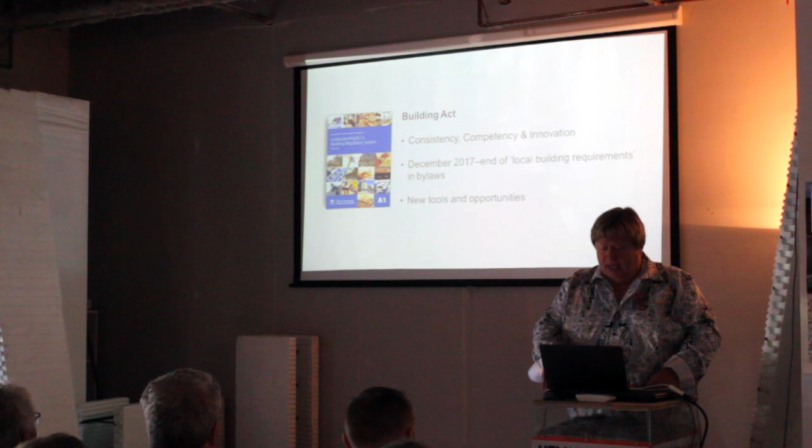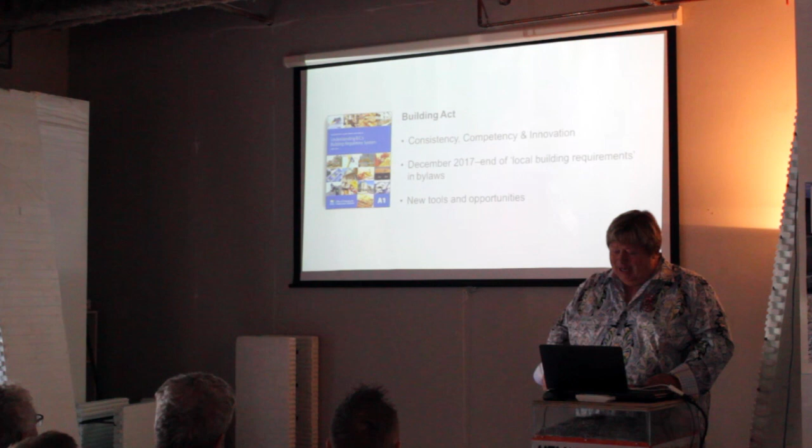A lot of political stuff here. The Building Act in British Columbia makes the building code actually law. They've declared that it's going to be consistent, with renewed competency and innovation embraced in the BC Building Code. In December 2017 was the end of local building requirements in bylaws, so nobody's had any trouble with the building official giving you weird interpretations since last year, has it?

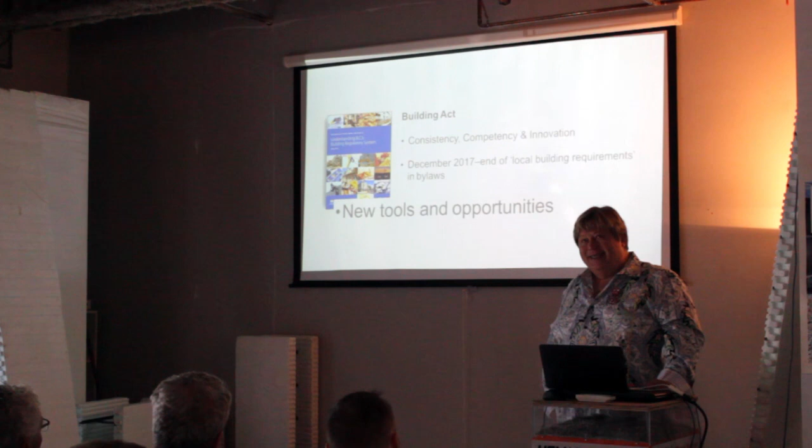The intent of regulatory reform, the intent of all these programs, is to see a general migration towards a smoother, easier, more consolidated approach to administering building codes and designing under building codes. But everything takes time. This is the chirp chirp from Victoria, and I do want to put it out there because when they say things, they're accountable to those things, and that allows us to hold their feet to the fire.

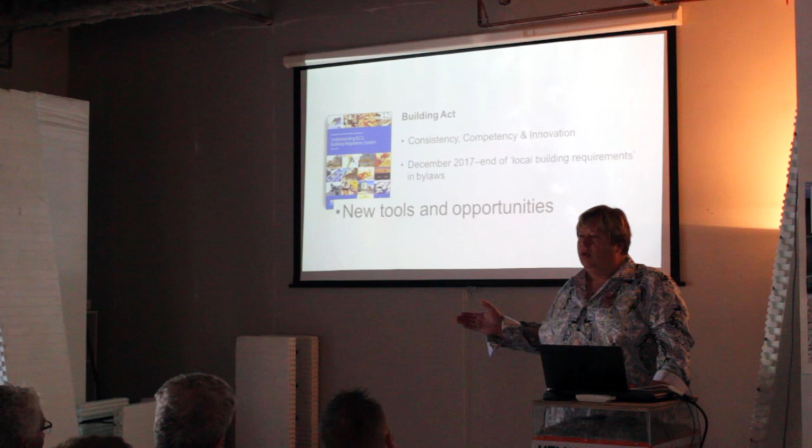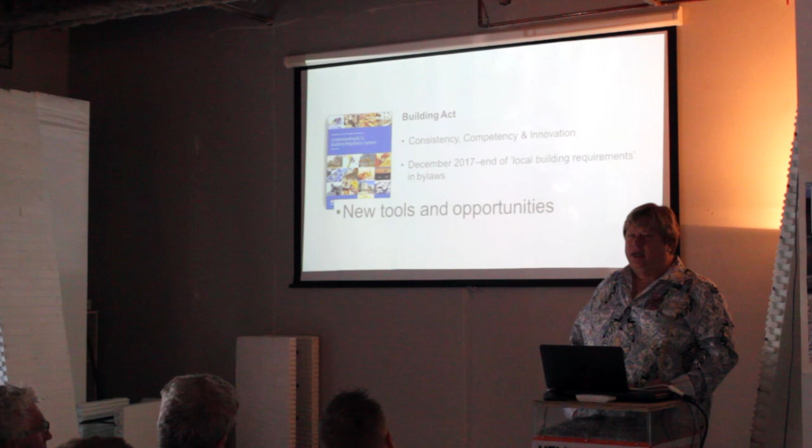It's also embracing new tools and opportunities, and we see that. Our new building code now has a prescriptive allowable section for exterior insulation and finish systems, EIFS. Anybody here know what EIFS is? Well, it's back, and it's allowed in Part 9 with channels as long as they're not less than 13% open and 9.5 millimeters deep. Is it good? I don't know. We're building a bunch and testing them because I don't think it's a trade-off for rain screen, but the code allows for it. So they are definitely looking at new tools, new opportunities, and embracing a greater cross-section of solutions.

But in my opinion, mixed into our building code now are specific allowable approaches to some stuff that's a little bit scary hygrothermally, especially in a marine environment. It's mild, warm, and it rains a lot, and it doesn't dry out very long in between those events. That combination makes us hypersensitive, so I think we want to pay attention to that moving forward.

Download it, read it. We have a climate leadership plan. In here is where they declare that we're going to be net zero ready for all new construction by 2032 in British Columbia. With the country now declaring that they're going to be there by 2030, I'd be interested to see if the BC government refines their approach to net zero ready or pulls those dates forward. And the reason I ask is because BC has been first and foremost since at least 2 codes ago.

And they kind of covet that position, and then suddenly this puts them in second place behind the country. We may see even a shortening of that requirement to step 5. So net zero by 2032, an energy step code for local governments to implement. There's the control that we talked about, and they've refreshed the Climate Action Charter, which I've come to understand is saying, well, the old Climate Action Charter wasn't something that we did very good under, so we're going to change it so that we got a chance of maybe achieving it this time.

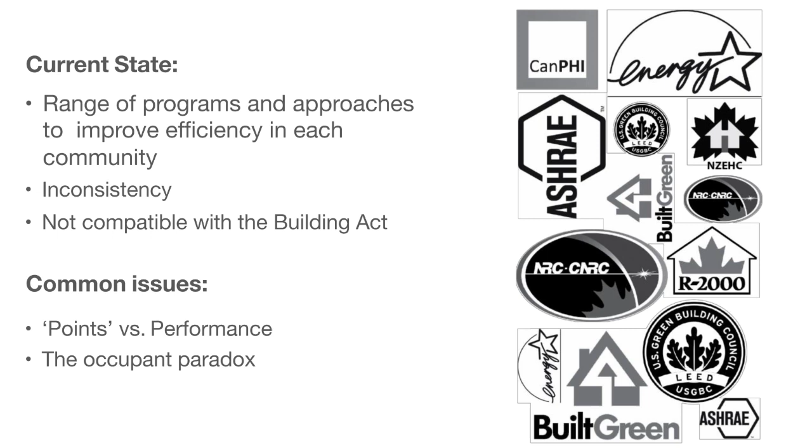So a lot of interesting things going on in the current state. We've got a lot of programs for energy out there—Energy Star, the Passive House Institute has a Canadian standard for passive house. That is like net zero times crazy—super, super high energy efficiency. That's where when it gets cold in the house, you clap your hands together and rub them, and that warms it up. We're hearing rumors that the Canadian and British Columbia political processes are looking at targets in that range for another 10 years down the road beyond 30. I'll tell you right now, that's a lofty goal.

ASHRAE is a tool that we can use as design professionals, engineers, architects, and specialists who deal predominantly with mid and high-rise big boy buildings under Part 3. That's their tool, very comparable to our 9.36. When you compare them, they look very similar in how they're used and what they're concerned with, but the ASHRAE standards and the National Energy Code for Canada are really targeting larger structures. Part 3, 9.36 is intended to be our goal, or rule book, for Part 9—so under 4 stories and less than 6,000-ish square feet in footprint over the lot. A lot of things you find in these different programs, the old R2000, and some of the new ones, is they muddy the waters between energy efficiency and environmental sensitivity.

I've done a lot of lecturing, I see a lot of familiar faces in here. I don't want to go too far into proving this out, but you can make some tremendously smart energy efficiency decisions that are horrible for the environment. Case in point, British Columbia: changing over from an old tungsten filament conventional light bulb into compact fluorescent. When you put electricity into an old light bulb, you get two things out of it—light, which uses almost none of the electricity, and heat. But what's interesting is, because it's fueled by electricity, at what efficiency does it produce heat? 100% efficiency. That's the beauty of electric-driven heat. If it's producing heat, it's doing so by definition at 100% efficiency—otherwise it's just not using energy, or it's using energy for something else, like light or kinetic motion. But if it's heat coming out of it, it does so at 100% efficiency. Now, when you take all those 100% efficient electric heaters out of a house, consider for a moment what's the green carbon footprint of electricity in British Columbia?

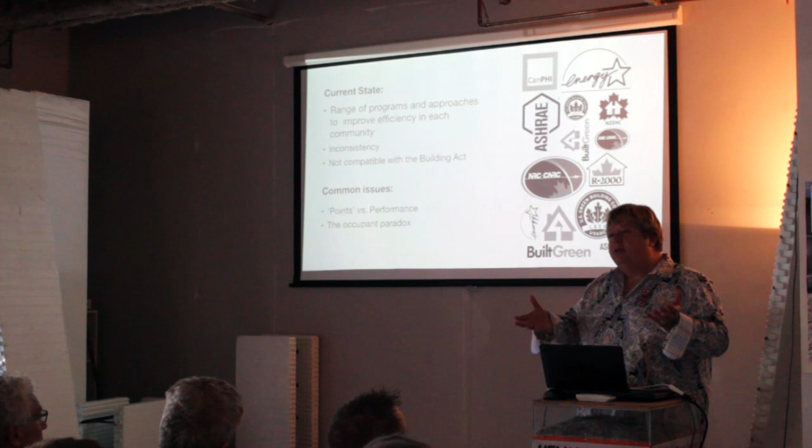And I'm really compelled to not make green choices here in British Columbia because I'm chasing the cheaper fuel, even with carbon taxes and everything else. There's a lot of interesting stuff that goes on, and I haven't even touched on some of the other challenges. If you look at LEED and Built Green programs, they balance energy efficiency with doing things that are good for Mother Nature as well, and you get points for this, and the combination gives you your labeling.

It's important to understand that 9.36 and the STEP code, and the legal jurisdiction of the federal and provincial code, only relate to energy, not the environment. So when we talk about energy efficiency and chasing 9.36 and a STEP code and all of these things in our building codes provincially and nationally, we are not driven by an underlying conscience for the environment. We are being driven specifically to reduce the consumption of energy, and there's nothing suggesting we're driving that consumption to a greener energy source.

There's a lot of pressure for us to burn more natural gas. So I commend that we have programs like Built Green for Houses under CHBA. These are important, but they aren't all energy programs. They will have a role moving forward, but their role will be that at the baseline they meet a certain energy performance criteria that matches to a STEP code, and beyond that you're doing something good for Mother Nature.

And that'll be for those few but very real consumers out there who have the money and are quite green-vested — they're willing to pay extra money to do the right thing by Mother Nature. And there are builders who concentrate their practice on that.

When you look at the green footprints of these products, and compare foam plastics in an expanded format versus extruded or foamed in place or polyisocyanurates, this stuff greens pretty nicely. It does come from an oil derrick, but then it's steamed into a sort of a big Rice Krispie treat, pressed into its compressed formats, and then put into these wonderful shapes that we can use as leave-behind forms, which dual purpose and bring efficiency and fantastic building science to construction.

So there's a lot of things for us to think about. At the end of the day, remember, this whole conversation for the STEP code is all driven towards energy efficiency. Everybody wanted to get their name in here, apparently all of these groups were spoken to.

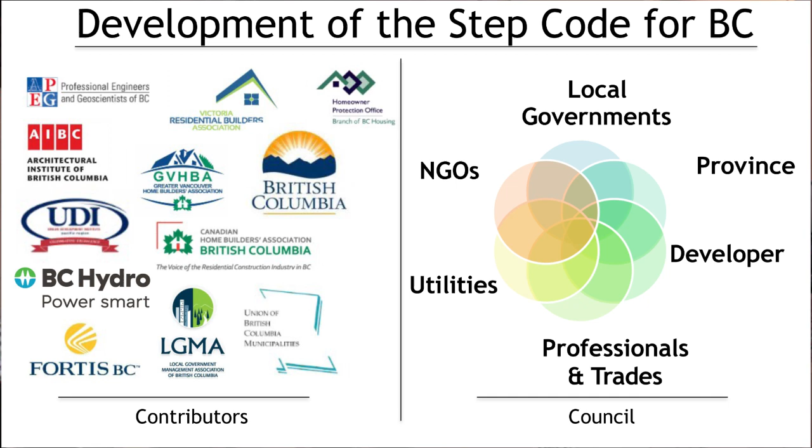I'm a member of Canadian Home Builders and GVHBA. I do personal or professional consulting for the province in the Homeowner Protection Office. I sit on the national task groups for many of the Part 9 code elements that we deal with here. I consult into Hydro and I consult into Fortis, but nobody even picked up the phone and called me about the STEP code when it was being developed.

There's a lot of people that want to talk about how the government is inclusive and they're putting everybody in here - look at the bottom, professionals and trades. How many people in here got a phone call, letter, or anything on the development of the STEP code when it was being proposed? How many people heard about it first when it became a requirement last year in '17, or are just becoming aware now? I don't want to pick too much on the government here, but their outreach is pretty shitty.

Energy STEP code - here's what you do right now. Step 0, if you want to call it that: if your community hasn't adopted yet, and many of them are in this position, then you're just bound by 9.36, and you can do prescriptive trade-offs or an energy model with an energy advisor. Obviously it's going to hit the level on average across all the climate zones we're averaging right now, so there's no net improvement to doing what we're already doing and continuing to do it.

When you go to Step 1, a lot of people have asked, well, what does this mean? What are we going to be delivering at the end of the day? Well, what you are going to be doing is abandoning prescription and trade-off. You're going to be working with an energy advisor, and in the politically softened language, they say the energy expectation there is improved. I don't know, because it doesn't improve it in any metric that we measured. It just firmly establishes that we're working with energy advisors and achieving the minimum requirements expected under 9.36.

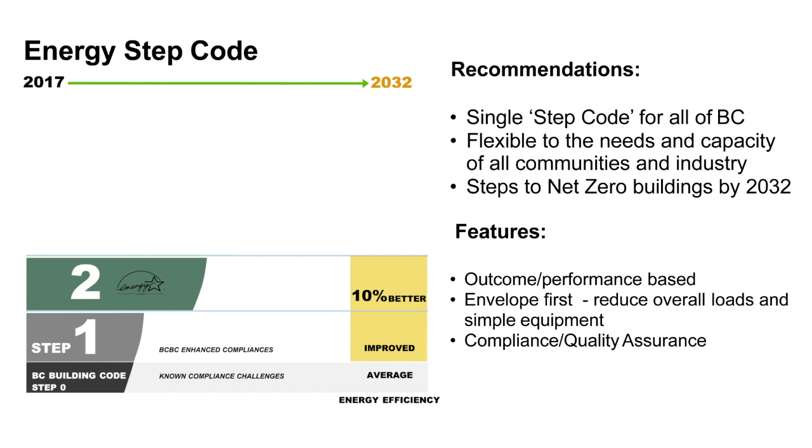Where we start to begin to see change is when they adopt into Step 2. And I'm not belittling Step 1 - if you're a community and you want to jump in and you're scared about changing the nature of construction, going to Step 1 just gets everybody used to working with an energy advisor, creating those habits in design and construction. That's actually going to be half of the challenge for most of us through this whole STEP code: learning to trust and engage quality energy advisors who know what they're doing and know what options are available out there, and can help you research and develop the choices you're going to make.

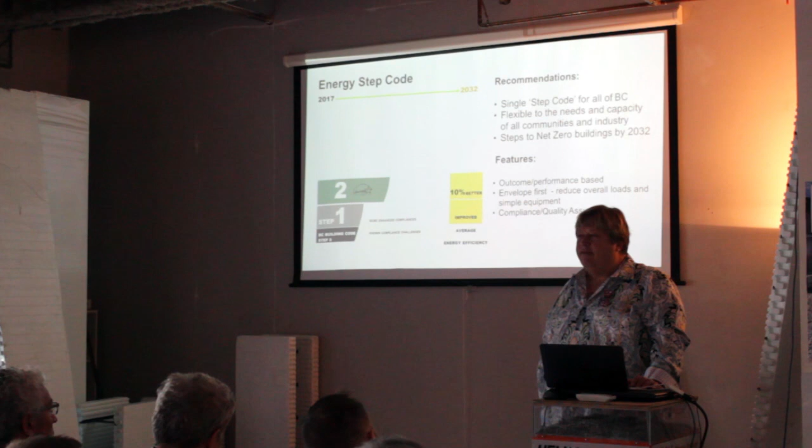Here's a caution I put out to you. We just took - and this is not a dig - our warehouse girl who worked at Safeway, and we jammed her into the Energuide Advisor program in May, and she's now an Energy Guide qualified, nationally certified energy professional. We've piled her up with the door fans and everything else, and oh my God, she's been crash-coursing in building science and everything else, but in her own words, 'I'm not doing this without you overlooking all the files.' We offer a very comprehensive service beyond energy.

We'll give you the energy advisor, but we'll help you figure out what you want to build, how you're going to build it, what the hydrothermal risks are about that, where the cost advantages are, tricks, trades, all that kind of stuff. But working with an energy advisor, jumping in at Step 1, as soon as everybody's in this situation, how easy is it going to be to find an energy advisor 2 and 3 years from now? So if you're not working with one right now, strong suggestion: lock it up. Get somebody who you can work with, who you trust, who's reliable, who's professional, who has experience that satisfies your needs, and pay them what they're asking, and let's get used to it.

How easy is it right now to find somebody to put siding on a house?

Imagine what it's going to be like when everybody's jumped onto the step code. What happens when the provincial government—because right now they're encouraging municipalities to jump in—what's the history of government? They give you incentives and encouragement to do something, and then a year later, what usually happens? They make it law, and all the money goes away, and all the freedom goes away, and you just have to do it. So reading between the lines, all your communities in BC, I think you can reliably expect are going to be somewhere in the step code in the next 18 months, maybe less.

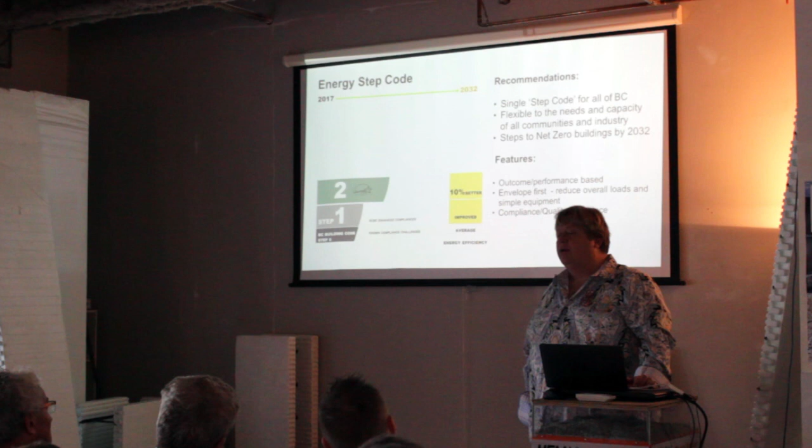At step 2, which is consistent with sort of Energy Star as a program, what you would gain if you subscribe to an Energy Star project is about 10% better energy performance than what you have right now. Moving through to step 3, you're starting to align yourself with the highest level of Built Green program, the CHBA program for energy and sustainability. You can see that's actually a marked improvement, 20% energy performance improvement. That's real, that's measurable. If you're just doing it in money, the money you're spending on energy you would expect will go down by 20% if everything else kept level.

I will also suggest, if we were only going to step 3 and building to that level, you could do what you do today and you'd probably be okay. You just need more insulation in the wall—so you go from R20 to R22 to R24. You'd push your R values in your attics up, and you'd push your R value below grade up substantively over where we were in the past. By doing that, getting air tightness under wraps, you could continue to build the way you are right now. And hydrothermally, the risks are probably not that much greater.

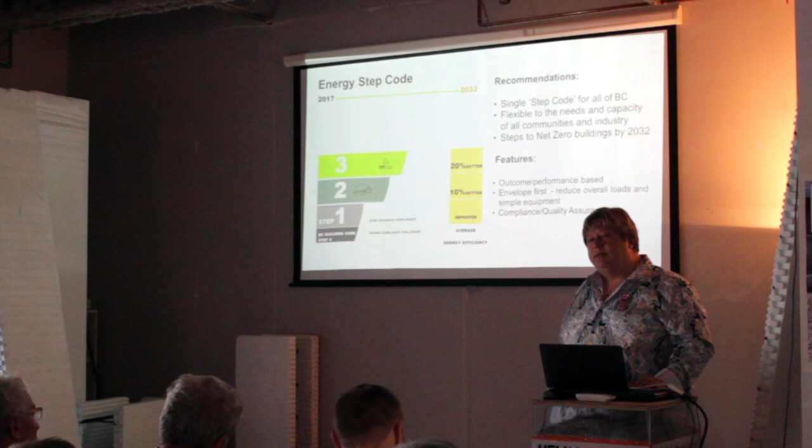But beginning at step 4 and 5 and beyond, something weird starts happening. If you continue to build basements the way we do conventionally, with studs and pink insulation and poly on the inside, they will just fail. If you continue to build walls out of 2x6 and try and stuff more R value into that cavity, you'll reach a limit far short of step 4 or 5 or beyond. And if you continue to vent conventional attic spaces, they're all going to go moldy on you. It's just night sky cooling—lots of studies on it. We know this. We have houses right now that work by accident because of that energy flow. And when we take it away, these are the symptoms: basements and walls and attics, the way we currently build, stop working.

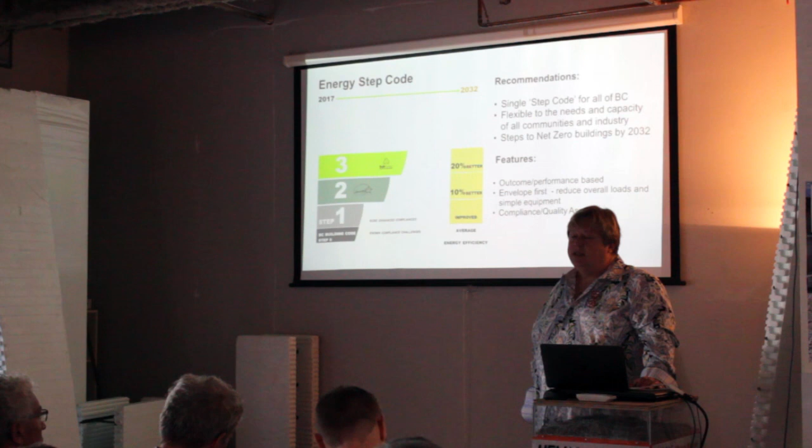So as we move towards step 4, and certainly when we make the quantum leap into step 5, you will be building different houses. My message—if nothing else leaves here with you—is that you have a choice in this industry as a professional, as a builder, as a supplier, as a manufacturer, as anything. The most efficient thing you can do right now is find an energy advisor group you can rely on to grow with, and make a very significant effort right now to figure out what changes you're going to make to your methods in construction for basements, walls, and attics.

So what I'm saying here is, I could sneak out with a 2x6 wall for you up to about this level. Once you go beyond this level, the old R2000 level, I can't do it for you with a 2x6 wall and a conventional vented attic. They just don't work anymore—too little energy flow through the envelope to reliably get reasonable performance. And that's exaggerated in the marine environment, so you're soaking in one of the toughest environments to build high energy efficiency. The irony is, the reward for high energy efficiency in our environment is the least of Canada, because our heating degree days are sub 3,000. The rest of Canada is way north of 3,000 heating degree days.

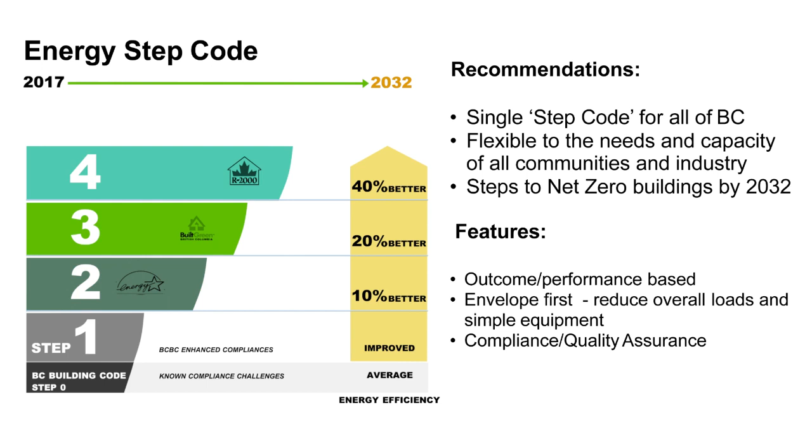So we get the least advantage for energy efficiency, and we incur the greatest risk. If you're working in 5 communities right now, say City of Vancouver, Surrey, Tri-Cities, Burnaby, and Aldergrove, or even just 2 of those, what are you going to do if one's at step 0, one's at step 1, one's at step 2, one's at step 3, one's at step 4, one's at step 5?

That's my question. Is it mandatory to take step 1, everybody? Are we back to municipalities where I gotta go, Burnaby, oh you're at 2, you guys are at 3, 1? Is there a minimum, first of all? No, the minimum is if they don't adopt anything, it's 0, it's status quo under 9.36.

So what I'm suggesting is you could research a way to alter how you build roofs, walls and basements now, and keep the energy intensity low by using minimal blocks, minimal insulation, achieving air tightness through greater detailing, and getting rid of vented attics, moving toward a system where you don't have to get fatter and fatter with that wall, because the penalties there are huge. It eats up FSR, and it's very inefficient to use fluffy insulation when the wall gets fatter and colder on the outside, so it risks more and more failure.

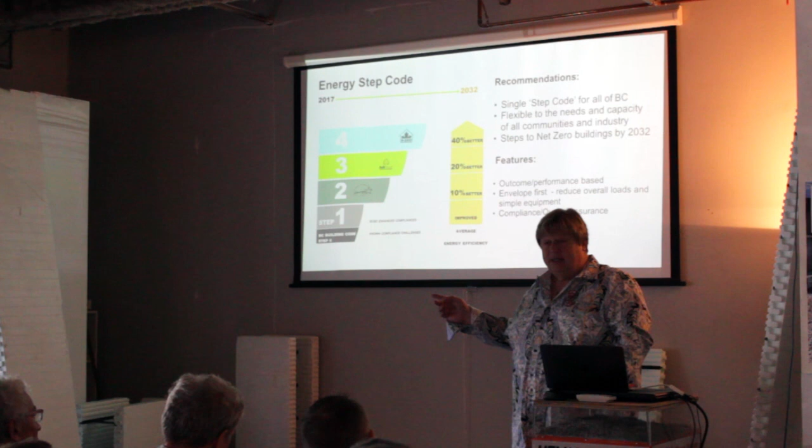What you want to do is take a look at all your different options. What about ICF all the way up to the rafter? It's crazy good for the basement, but also crazy good hygrothermal performance above, and at R24 effective you're already past City of Vancouver requirements. By building into this minimally, yes, you're overshooting steps 2 and 3, but you're learning how to work with these products.

So if we go to that code right now, we're doing our own codes. When I go to Langley, they say, hey, nice job. Then Burnaby says, hey, you guys really have to do this. And Langley says, hey, wow, you guys are doing a great job, we're only at step 1, you're at step 3, and you're achieving step 3.

You could keep your attic insulation lighter in value and switch over to a conditioned attic instead of unconditioned, and move all your mechanical equipment, if you've got a full basement, up into that attic, so you don't have to insulate all the ducting when you push it up. These changes in construction type allow other freedoms in design, which actually make construction, even though you're overshooting step 0 or 1, still competitive.

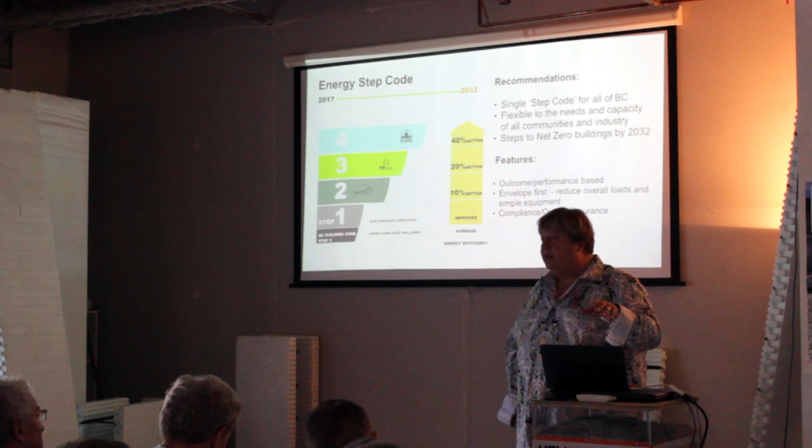And in fact, I can show you it for sure keeps you competitive, even against other people doing a 2x6 with a vented attic and a garbage basement. It's going to come up to the builder then who wants to do that and get ahead of these guys. I'm going to determine it, not Langley or Burnaby.

You're taking control. Now, let me add one more thing. If you get good at that, what's the only thing that changes marginally from jurisdiction to jurisdiction? The block or the exterior width on the outer wythe, or adding more insulation to the outer wythe. With your attic, it's just more insulation in that conditioned format. For air tightness, it's just greater attention to detail at your detail transitions so you can gain that air tightness. But the skill sets for you, your subtrades, your supply chain, everything remain unimpacted as you progress through here.

If you don't, and you try to sneak this out, you may have to relearn how to build twice, at least, through the step code. Who wants to go through that? It's crazy.

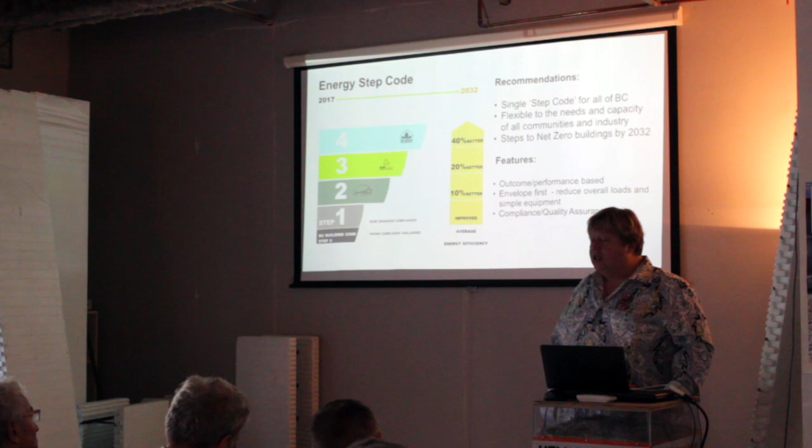So Mark, if you go to a conditioned attic, what material would you use for insulation that doesn't require... it's got to be airtight. That's the condition by which you have to achieve it.

SIPs or something like that? SIPs will work. SIPs works better with a vapor open peel and stick. When we go up north, that's where the failure is in SIPs, at the joints. So we foam the joints, but we cover everything with a vapor permeable peel and stick as a second plane of protection. It's awesome, 2-pound foam, amazing.

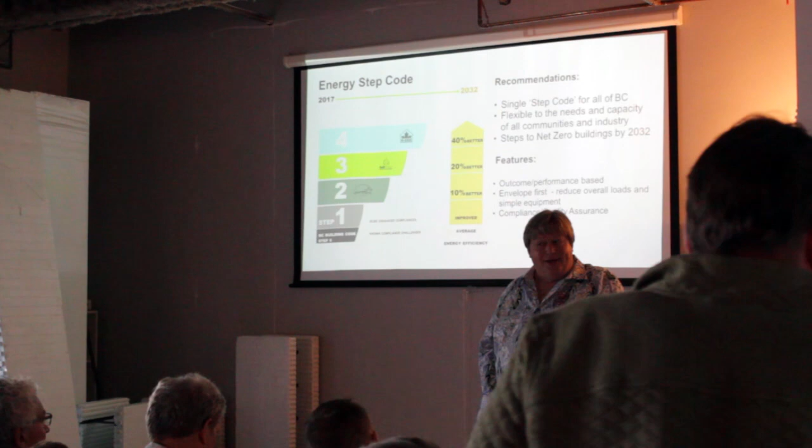What's ironic is they had a beautiful way of accepting foam just before Tim Rice and Dave Ramsley left. I don't want to talk about the City of Vancouver too much, but when they say no, they say no. Next week we've got Chris and all the people coming over from the City of Vancouver. We're showing them conditioned attic approaches and why they work. I think it's an idea whose time has come.

It absolutely is, let me reinforce that concept. 20 or 30 years ago, how did you build a crawl space? You put the insulation and air tightness up on the floor and vented the crawl space. How do you build crawl spaces now? Anybody building that way? You insulate the walls, you create air tightness, and your envelope now becomes the slab, the walls, and the continuation of your envelope. When did the code change that took us from vented crawl spaces to conditioned crawl spaces?

2006? No, early? No, it didn't change. You're still allowed to do both, I don't see it the other way now. It was the builders that took us there.

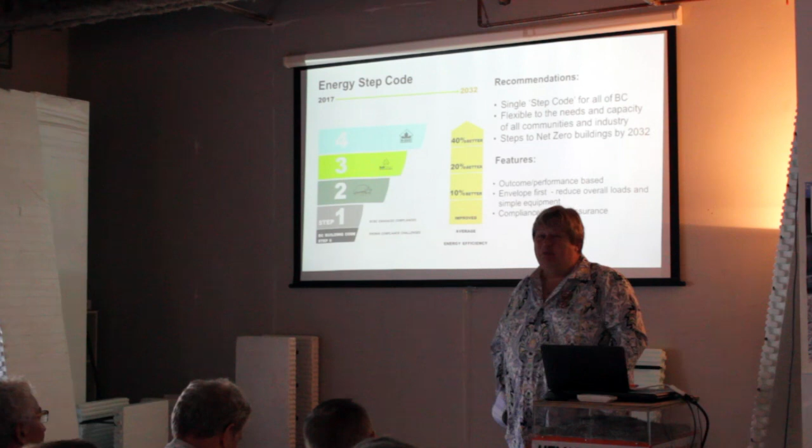The builders took us there because when they were putting in a crawl space home, they were forced to use square footage on the main for a mechanical room. Then some builder looked and said: if I condition that crawl space, and talk to the mechanical community so they build me equipment that works in a 4-foot clearance, I can stick it all under the stairs and in the crawl space, and now I can sell square footage that was a mechanical room on my main. When they ran the numbers on that, it paid for the whole transition.

That's everywhere up country, right? Now we're faced with the reality that a lot of people are completing basements or leaving unfinished basements. When you get up north to build a crawl space, you actually have to dig a basement and then backfill it, so they just leave unfinished basements in there. But if you do that, then where do you put the mechanical?

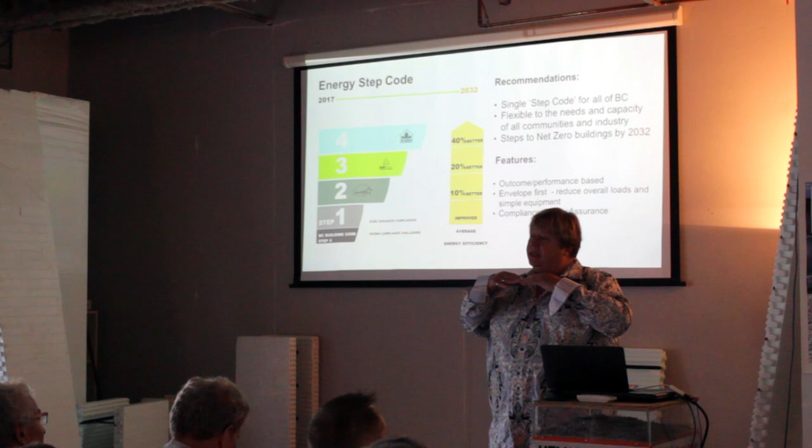But if you condition the attic by taking the insulation and air tightness off the ceiling and pushing it up, what can you stick in your attic now? Everything. You run ducting through there so you can run all your service and air conditioning, dropping heavy air down so you don't have to overstress your AC or heat pumps. You can put high side returns in there for great circulation. It's just cheaper, faster, better, and it's all stuffed up in that conditioned attic. You save a lot of money.

And think about your ceiling now - what kind of pot lights and everything are you putting through the ceiling? Regular ones, because your envelope's up. The key is it's got to be airtight, and that's why foam plastics, spray-in-place foam, or SIPs are really good choices. You're free to play with ICF too - I don't know if you're allowed to span it on a sloped roof, but that'd be kind of cool.

And then when we get to step 5, basically they're saying net zero ready. Some people are throwing numbers around of 80% better, but we've run some numbers on step 5, and there's every likelihood it could be 100% or better energy performance than what we're dealing with right now.

How's our time doing here, Joe? Okay, what time's lunch coming? You got 40 minutes? Perfect, exactly what we need.

So what we need to do is look at the step code - for step 1, 2, and 3, you're going to be working with certified energy advisors. I think they have a different name for them now at NRCan. Everybody needs new business cards in government every 2 months with new names. But what an energy advisor does is go in and look at all the metrics - window performance, solar heating - so they need to know which way your windows are facing and how you're oriented on site.

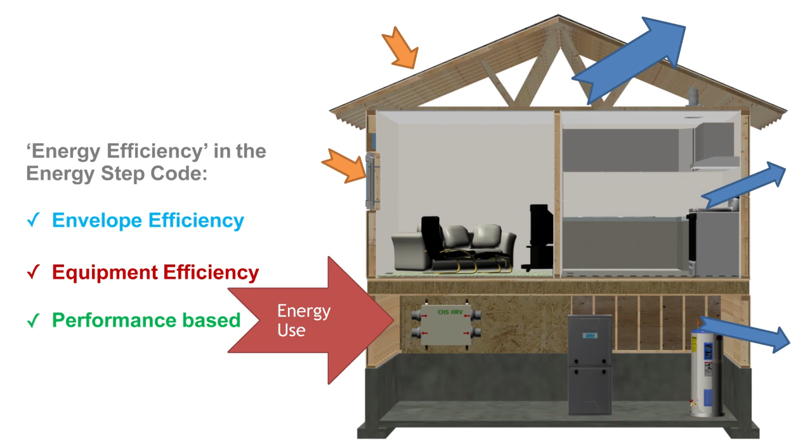They look at the effective R-values of all your different systems below grade, above grade, and in your attics. They incorporate a door fan test to determine overall system air tightness, measuring it as air changes per hour at 50 pascals. So there are physical tests that go on.

There's visual confirmation after design to confirm that you built what you said you were going to build. The amendments between design and construction are factored into the original performance file, and at the end they issue an as-built equivalent energy profile. It comes up with one simple metric: the amount of kilowatt hours of energy in all forms that home will burn every 12 months, based on the energy performance you achieved with all of that radiant, conductive, convective energy through air tightness, window glazing, fenestration performance, insulation, conductive resistance, all the things that go in there.

So I guess the nice thing about working with an energy advisor is things can kind of simplify for us as designers and builders, because we're relying on professionals to do it. But remember, an energy advisor is not motivated to give you the cheapest, most cost-effective way to do something. They're motivated to get you your energy file. That's where experience with an energy advisor becomes important.

Because if they've seen a million solutions, you can what-if them. What if we do this? Do we still get our energy? Yeah. And then you as a builder can say, yeah, and I know I can get better supply rates on this kind of construction method than I can on that, or I'm paying way too much for site labor right now, so I'm going to look for something that's more factory developed, SIPs or ICF, taking a ton of the labor out of the traditional forming that goes on with foundations.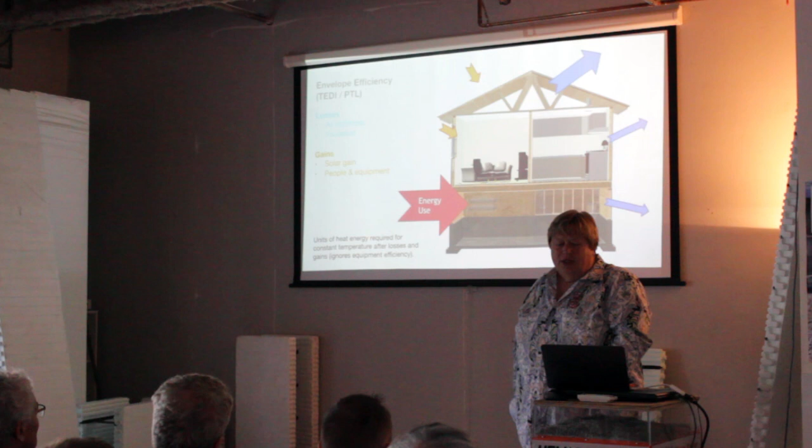You'll be able to work with your energy advisor. By the time you get to the upper level, things start moving over to simply achieving conformance with metrics. Once you get up into high energy efficiency, there's so many combinations and permutations, and energy modeling sort of loses a lot of its reality, because at the end of the day you can use an all-in, all-out kind of approach. So TEDI is something I want you to get used to. TEDI is—I think I've defined it for you—it'll come to it.

TEDI is Thermal Energy Demand Intensity. What it basically talks about is how many kilowatt hours of energy you are going to use per square metre per year. In its purest form, that's what an energy advisor does for you.

But you'll be able to develop those metrics based on systems approaches when you're in the higher levels. And as long as you can show that the overall TEDI performance of that house is within the target goals, it's deemed to conform.

So your energy support through energy advisors will go away from HOT 2000 and programmed responses. It'll just go into pure calculation of metrics, so mechanical engineers or new generation energy advisors are going to be able to produce that metric for you.

The other one they've got in there is Peak Thermal Load, PTL. This metric's kind of interesting. It sort of runs on the theory that if you build a house and limit the biggest size available for heating and cooling in a home to X amount of kilowatt hours of generation,

so you only have this big furnace, or furnace and cooling, and heat pump, then you're going to be forced to build the house around it that maintains 12-month comfort.

The problem they find is this creates a fantastic disparity between archetypes of homes. Basically, using this peak thermal load, you can get away with murder on large small houses in mild places.

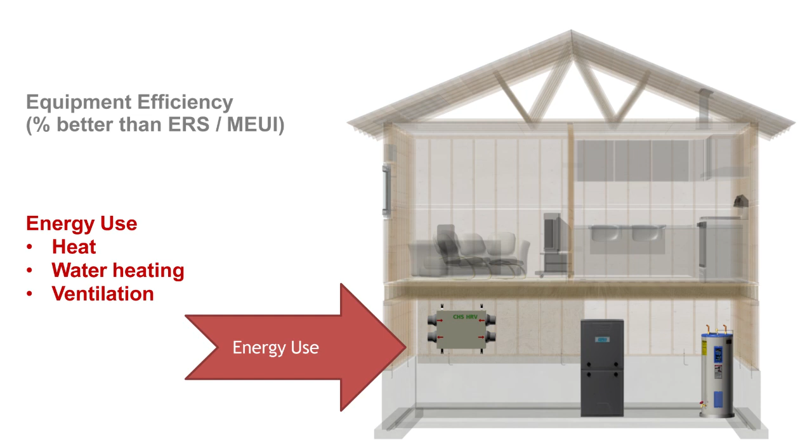The energy ERS, or the MEUI, Mechanical Energy Use Intensity - what that equates to is you look at all of the mechanical stuff in there, not the peak demand. On the coldest day, what's the smallest furnace that can keep this comfortable? That's the PTL metric. The MEUI looks at all the mechanical devices - HRVs, air conditioning, heat pumps, furnaces, in-floor with boilers, anything contributing mechanical energy into the home. We look at this mechanical energy use intensity as a general indication of the performance of the home, and it actually does a pretty good job too.

The only problem with it is, how often when you're speccing a furnace do you talk to a mechanical supplier and ask them what size furnace they're going to put in, and the first thing they do is check their warehouse and see what they've got a stack of? Are they really doing an energy loss calculation before they size that? Are they considering the efforts you're putting into designing and building your home? So if we're going to use MEUI, we have to pay particular attention to the fact that the mechanical systems are going to go through a fair amount of scrutiny in the energy advisor's hands, because they'll have an energy loss calculation as part of HOT 2000, and they'll determine that no, you don't need a 4-ton unit in here, you can do it with a 3-ton unit.

I have one other question too. When we put fans in for exhaust, 9.32, etc., which has a direct impact on energy performance, who do we usually trust to install the fans? Carpenter.

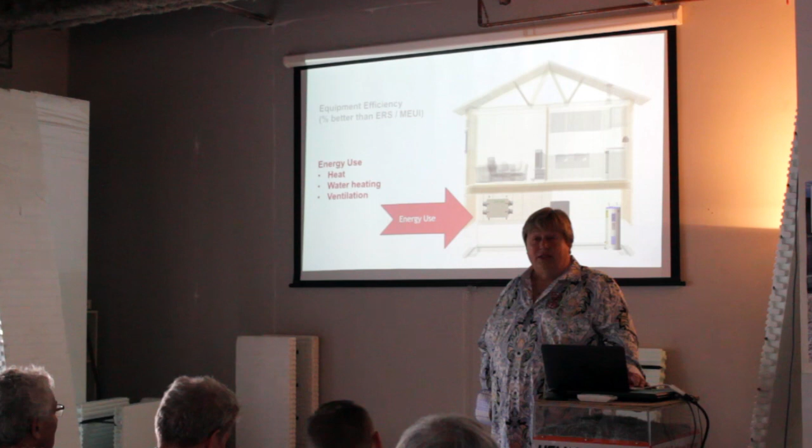So as we move forward, the builder's job is going to become one of developing and managing your approach in construction that minimizes some of those nightmares. You want to take back control and ensure that the fans going in are right-sized, that energy recovery units are installed so they can be managed and maintained or properly sized, and that you're passing on the maintenance requirements to the homeowner, because an HRV is a waste of money if you're not cleaning out the filters.

So our job as builders is simply going to become more knowledgeable about what it is we're doing and become very good businessmen with it. We're going to have other generals working in our camp, with energy advisors. As long as we hire the good ones, we should be able to wage some pretty impressive campaigns.

And in the background, use services like Van ICF and ourselves, who have spent a ton of money putting square footage into committed training. You can come into our place and we'll give you a 10-foot blank wall in whatever it is you want to build, and it will have 4 windows, a door, a dryer vent, an electrical penetration, a hose bib, an alcove, a roof transition, a rim joist, an attached ledger, all on one 10-foot by 10-foot wall. Bring all your guys, bring your sub-trades, plug them in, get them to build that over 3 days, and then we'll test it at the end so we can show you what's going on.

Who here's taken our window and door installation course? Anybody? People come out of there like they've just had a religious experience. And then the next thing you know, they've got their CPDs, but they're booking out 6 of their guys. Just go in there, tell them we want box frame windows, and I want you to come out of there knowing damn well how to put them in. And what's really fun is we'll show you how to put windows and doors in way faster and way cheaper than you're currently doing it.

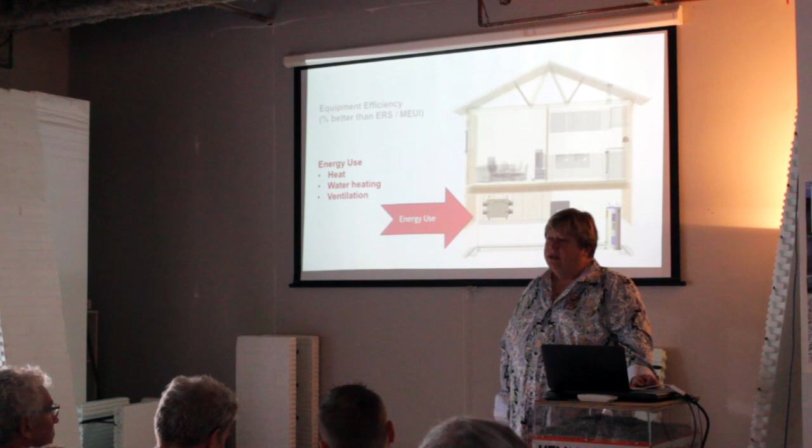And so that they don't screw up in 20 years. So there's a lot of really good information, but building in this new environment is going to require more education. That's why my wife and I have sunk so much time into it. That's why your ethical, committed, devoted suppliers out there are absolutely devoted and committed to making sure you're getting good knowledge and understand how to use their products properly. I'm sure you guys aren't interested in somebody using ICF and having a bad experience, right? So knowledge is the only thing missing between having a good experience with ICF and a bad one.

How do you consolidate it? What's the load? All the stuff we'll deal with this afternoon back here.

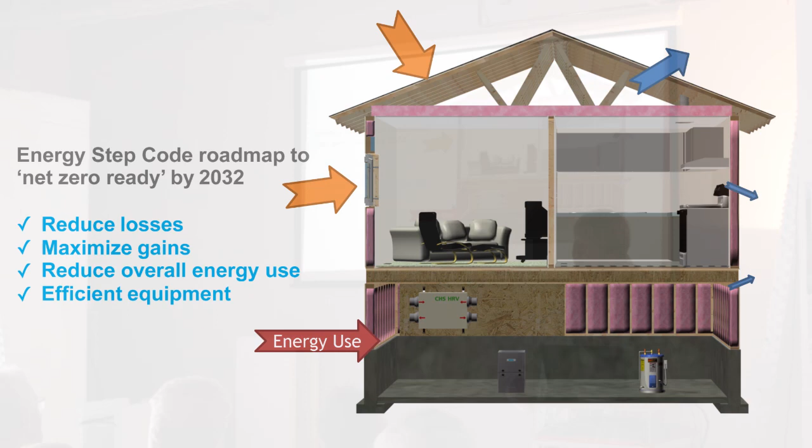So as we move through, understand that the step code roadmap is to try and get us to net zero ready by 2032, and don't be surprised if that tightens. If we take a look at conformance under step 1, basically energy modeling is required at step 1. You're required to test your air tightness and report it. You don't have to meet a certain minimum level.

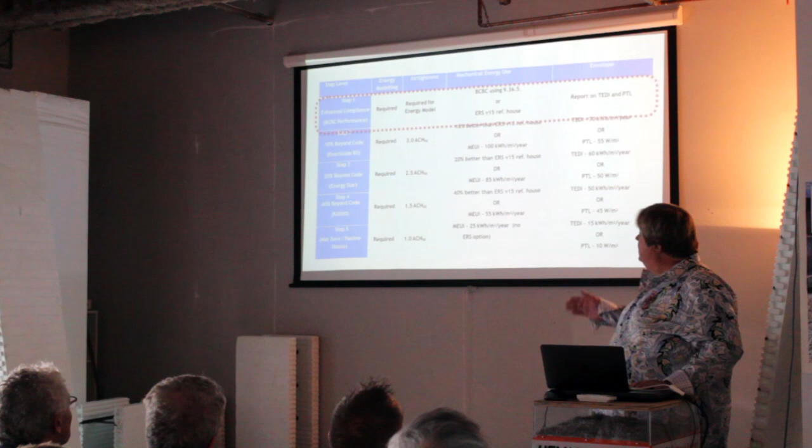Your path for conformance is using the BC Building Code under 9.36.5, which is the performance path. At the heart and soul of 9.36.5 is your energy advisor giving you an EnerGuide rating score based on their HOT 2000 software version 15, based on a reference house. They'll take your house, theoretically build it to the minimum of 9.36, then remodel it based on how you're proposing to build it, and compare the two. So you're allowed to do whatever you want as long as it makes the code, as if you'd done it without tweaking it out.

So you can suddenly build a log house with crappy logs for R-value by reducing glazing area and making the thing even more airtight and over-insulating attics and basements. This is actually allowing us to explore tons of new freedoms that we didn't have under the limits of prescriptive codes. Dream it, and there's probably a way we can build it. Give me enough money, I'll figure out a way to build anything, but doing it cost effectively is something we want to watch for. So that's step one.

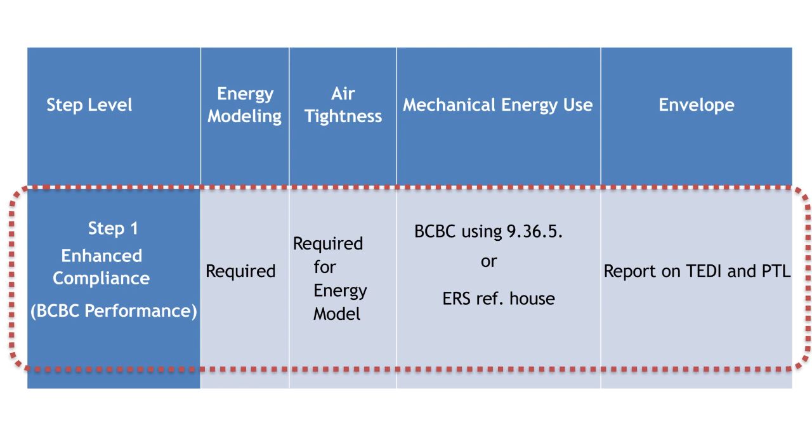You must model it. You must air tightness test, but you don't need to achieve a score. You're basically following the performance path at 9.36.5, and you're going to report the metrics. But you're not going to be reporting that PTL, because as of this December, we found out that metric, that peak thermal load thing, is just not doing what we need it to do.

So you will be doing your thermal energy demand index. That metric will be reported by your energy advisor. And the reason they want to report that and air tightness is information gathering. They want to see, as we move through the step code, what are we actually achieving, and then we can start to further refine the expectations, uncover certain archetypes of homes that we didn't consider that maybe are being treated unfairly at these different step levels, and bring things back into measure for them.

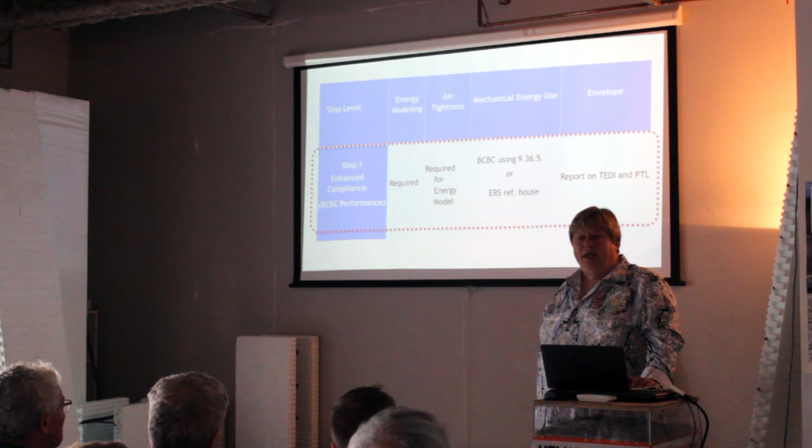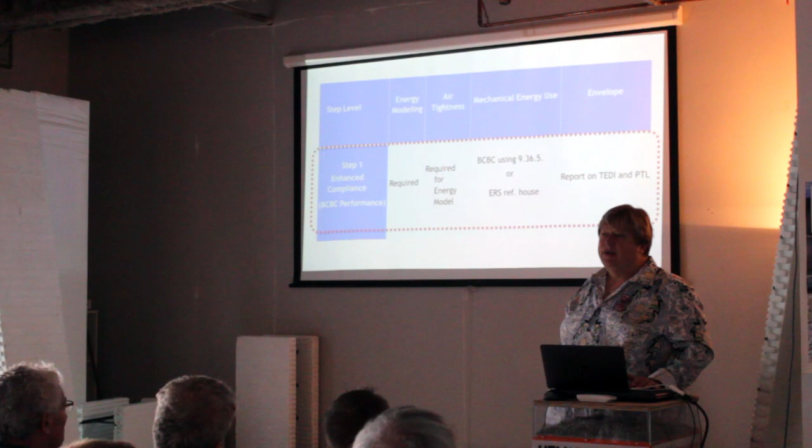These changes we see this December are the first round of that fine-tuning, to take advantage of the fact that not all houses are created equal. Even in the same energy zone, zone 4 or 5 or 6 or 7A, B, or 8, even within that unique zone, two different types of houses are going to have two different energy performance under the same regime. So they're trying to create it so it's very balanced and that you get the same reasonable, comparable energy results no matter what kind of building you put together or what zone you're in.

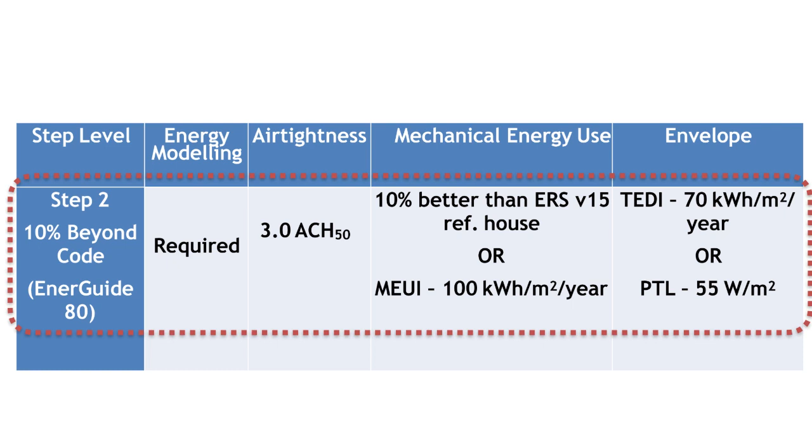Once you go to step 2, you are now working with your energy modeler, but you have to get to 3 air changes an hour at 50 pascals. Does anybody know what the average air tightness was over 100% of all homes built in the city of Vancouver between 2005 and 2008? 1.8, 2.4? As an ACH 50, the average air tightness was actually over 6.

Horrible. We're talking about ELA—no, I'm talking about air changes per hour measured at 50 pascals, the volumetric measure that we use in Part 9. It's not equivalent leakage area. That's a metric we can spit out from HOT 2000, but they use the air changes per hour metric measured at 50 pascals.

6 equates to a hole through the building envelope, if you add all the little ones together, about the size of a manhole cover. To get down to 3, you've got to get down to about this big. We're currently building a little bit better, but we're still in the 4 or 5 range, ACH 50.

Much better in the cold parts of BC and Canada, but that's because if you've ever spent a winter in, say, St. Gregor in Saskatchewan, and the winter wind is blowing at 35 below, you feel air barrier problems right through your bones. They chill you.

Shockingly, they have built, even as early as the year 2000 on average in Saskatoon, the CMHC files show that they were building at an average of 2 air changes an hour at 50. 1.6 is net zero. And what is it, 1 or is it 0.6? 0.6, I think, is passive house. That's crazy, right? You slam the door and your ears pop.

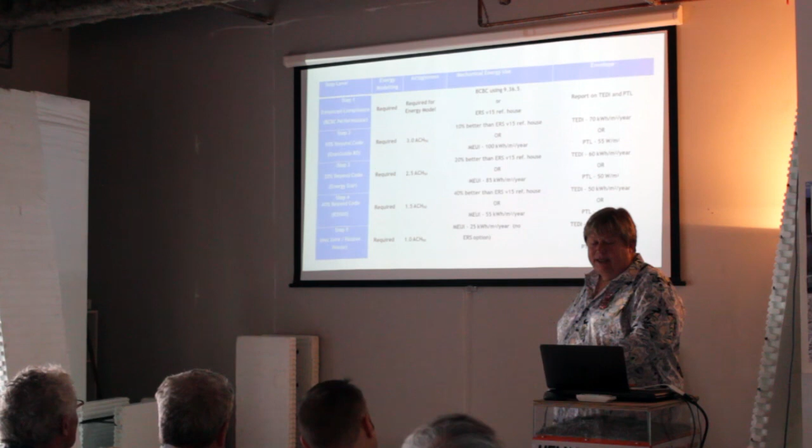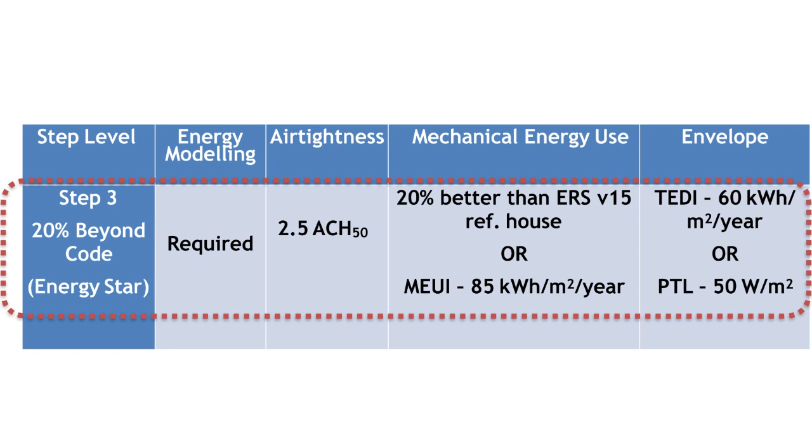You can see your full-on door fan testing, and you get introduced into using these metrics. By the time you get to step 3, you're tightening up to 2.5 - this is probably the best in BC. You're building in the 1.5 to 2.5 range. Certainly people out there are getting into passive house levels, but that's an extraordinary level of attention to detail for air tightness.

But if you deliver on the energy model targets here, basically it's got to be 20% better than a 936 current conforming reference home, adjudicated by an EnerGuide specialist who references your home as if built to 936, then models your home the way you're actually going to build it. You've got to come in 20% better than that. Or alternatively, you just use a mechanical energy use index - make sure you're below the metric on a square meter basis of envelope, and you're deemed to conform.

And for the building envelope itself, no matter which metric you go with, once you start into step 2, 3, 4, and beyond, you have to report your TEDIs, and those TEDIs have to meet the threshold maximum allowables for those different levels. So from here, it just basically beefs stuff up.

There is one noticeable change. When we get into step 4, you can see you're still using an EnerGuide rating system, version 15, HOT 2000, certified energy advisor - or you're going into a much tighter MEUI and a much tighter TEDI. You're also dropping into some pretty significant air tightness requirements here, but you're also delivering 40% better energy efficiency than what you're dealing with right now.

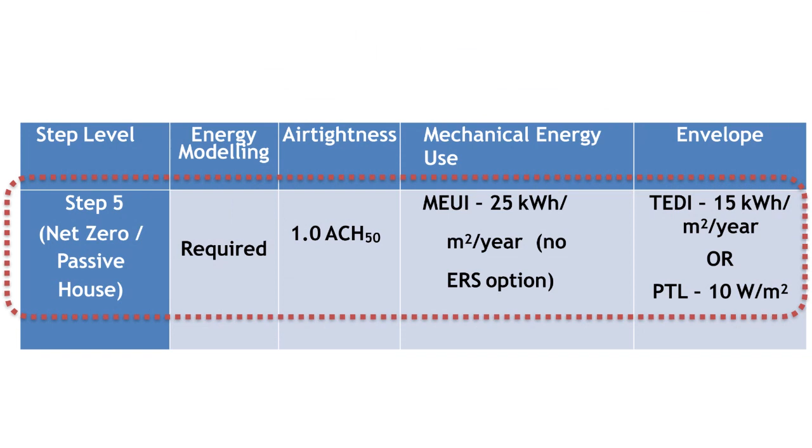And then when we make that final step, sometime between now and 2032 - and in some communities it'll be much sooner than 2032 - yes, you've got an energy model, yes, you've got a crazy air tightness level you have to get to, 1.0 flat, yes, you've got a very, very miserly mechanical energy use intensity number. You're only allowed 25 kilowatt hours per square meter per year of enclosure. You don't have an EnerGuide ratings option anymore, so you'll be working with an energy advisor, and you will be modeling, but you're just modeling to that metric.

So you see now the intent to phase out the reliance on the federal government's HOT 2000 program, and we're looking at transitioning the energy consulting industry into the new world order of just dealing with metrics - something the federal government can't ever take away.

In addition, as the backup to your mechanical energy use intensity, you're going to do the thermal energy demand intensity. That gives you an idea of a well-developed, designed home - you balance all of the mechanical, ensure it's going to deliver 100% comfort, and it's going to do so under an allowable threshold of 15 kilowatt hours. In addition, you've got the peak thermal load, which is more about how big your furnace has to be to maintain that energy efficiency. So those metrics exist, and again, the peak thermal load one is just going to disappear.

That, in a nutshell, is your step code, and the tweaks to the step code are what I just talked about.

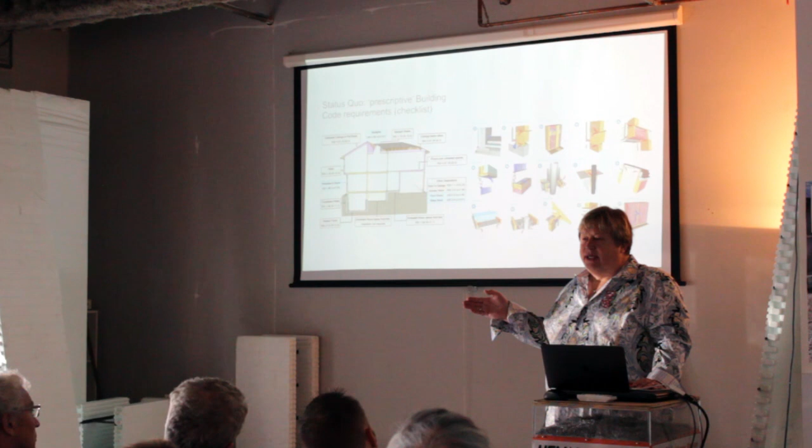What are the things that are going to affect that? The natural decay of the systems and elements that you build with. But what else is potentially going to decay energy performance over time? Off-gassing of insulation - this stuff's not prone to that, but blown foams are.

Retrofit and renovation, that's one. We can't control that, but we're going to have a code for existing buildings that's going to hold renovations accountable to the energy performance, so there will be checks and balances that'll help a lot.

I wanted to leave you with this, partly because our graphics guys are amazing. This is everything we talked about as it's identified in climate action and in the governance documents we get out of the province.

What I want to leave you with is a little thing to think about: what are the chances you're ever going to see a fragrance called basement? You're not. Because what do basements smell like? Dank - they smell dank, they smell like basements.

Musty. Not ICF basements, mind you, but basements we've traditionally built with concrete studs - pink stuff and a 6 mil poly bag in there, maybe moisture protection on the interface of the concrete. They actually don't even make code - there's nowhere in the code that describes that particular basement. It's just the way we've always done it.

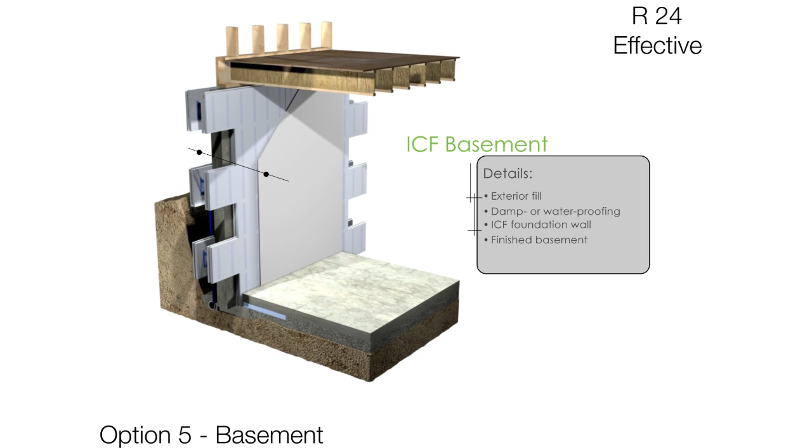Yes, the water comes up. Yes, it evaporates in between the EPS foam and the concrete and the mass wall. That very, very thin air film - because you're casting the concrete up against it, it is the form, by the way - that's why being massive and being intimate, whether through ICF or rigid directly adhered, or 2-pound foam sprayed right on interiorly or exteriorly, these all work, and they work incredibly well.

We've got decades of experience with all of those solutions, including ICF, and it's shown again and again and again that our WUFI hydrothermal modeling, our anecdotal and laboratory work, and our build-up and monitoring projects are all consistent with any kind of review work we do on the whole for basement systems out there. Same hydrothermal performance above grade.

So yeah, do we believe in it? Absolutely believe in it. I want to leave you with one other thought on the energy thing.

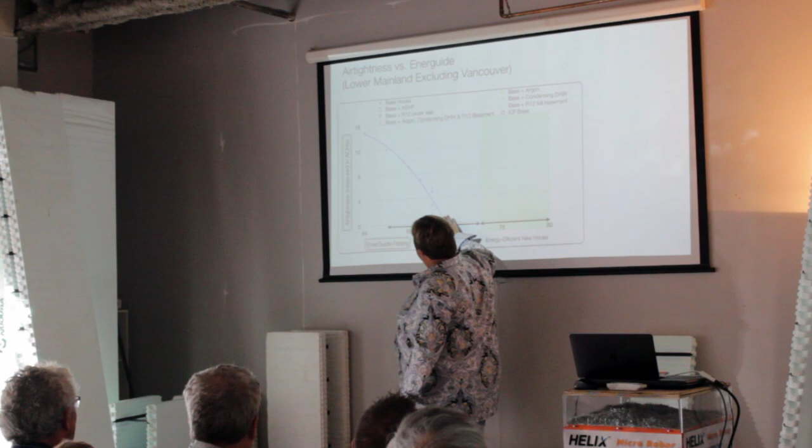If you build a base house right now, that curve represents the Energuide rating that you would get on the bottom using the old scale versus how airtight you got the house. So here's that average BC, here's the goal we're going to. If you build a house to the base of the building code with average air tightness, you can have an Energuide rating of about 69. If you build it in the lower mainland with great air tightness, you're going to get 71 on the same thing - 2 Energuide points just by getting it more airtight.

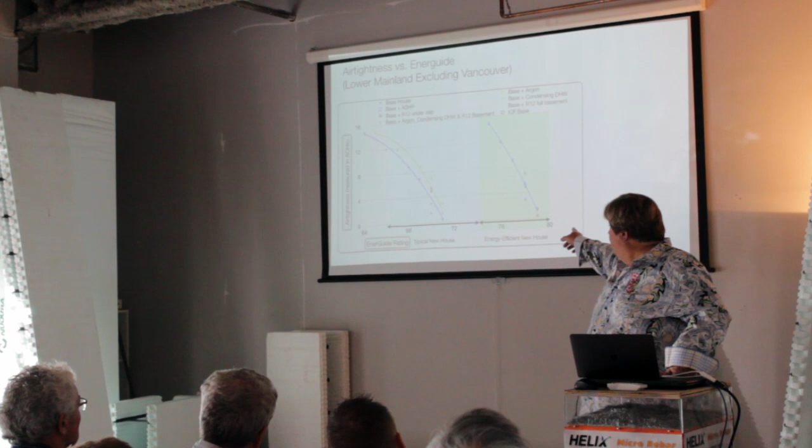Now look at the impact of building a base house and just adding argon to the windows - almost an Energuide point. Add an air source heat pump to that regular house, and look at where you are. The green is energy efficient, and if you get it airtight, you're achieving the goals that we have for 2020, step 2.

That's just putting an air source heat pump into an old pre-2012 house. But the one that I really wanted to point out to you is there's the effect of condensing hot water on a base house. There's the effect of putting R12 under the slab - almost nothing. It's almost a complete waste of time insulating under your slabs.

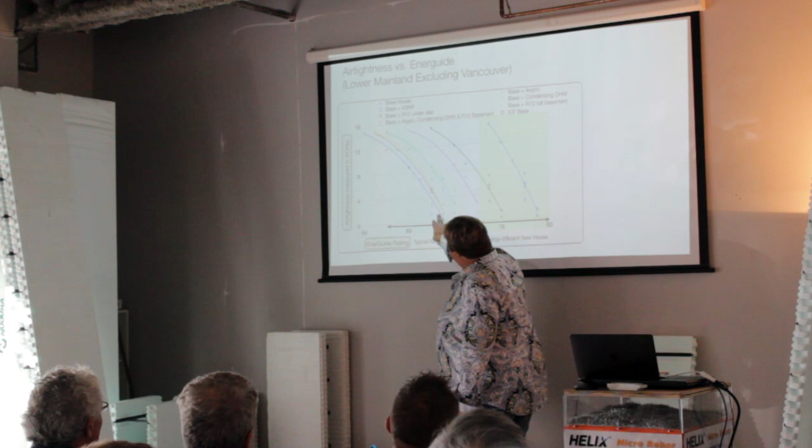But this is the one that gets me here - not that one, that's argon, condensing, and combined. This black line: you build a house today to the rafters in ICF, so basement and walls above grade, and do nothing else different, and your curve shifts - at the same air tightness, we go from 71 to 76. At $2,000 an Energuide point, that's a $10,000 construction advantage right out of the chute - $10,000 extra dollars just on the energy equation alone.

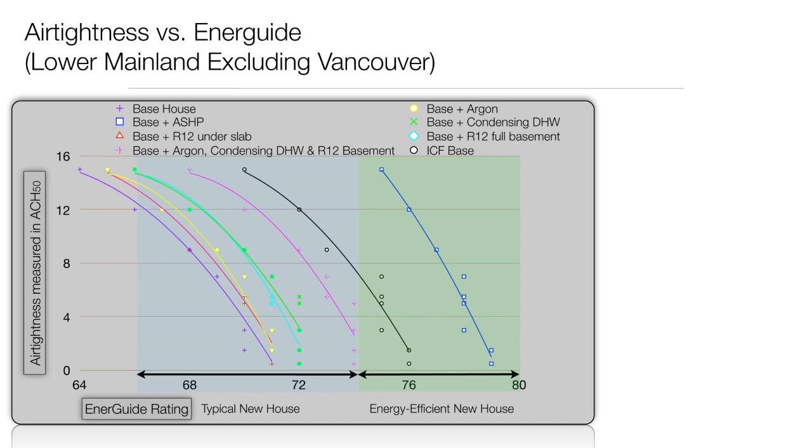And remember, we're building over here actually more at 69, and with ICF you're easily going to get into the sub-1, sub-2 category for air tightness. So the advantage could be $12,000, $14,000 just on energy - take out simplicity in construction and everything else. All important observations. Thank you so much, everybody.